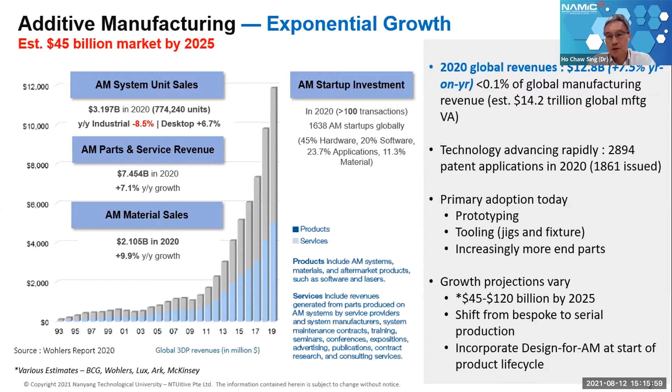One of the other points I wanted to talk about is that this technology, beyond materializing parts on demand to replace spare parts, the real value is in incorporating design from the start. You have to use the right design approach in order to design specifically for additive manufacturing, as opposed to design for traditional manufacturing. I'll give some examples in a short while.

And I mentioned earlier about new entrants - there are a lot of new companies coming into this space. Have you been following the news? ExOne, a binder jet metal machine maker in the US, was just recently acquired by Desktop Metal. Prior to that, there's been a number of SPAC mergers - special purpose acquisition vehicles created basically to direct-list companies. Desktop Metal went through that route. Velo3D, another 3D printer maker startup which supplies machines to SpaceX, Elon Musk's space company, has also been acquired through a SPAC merger.

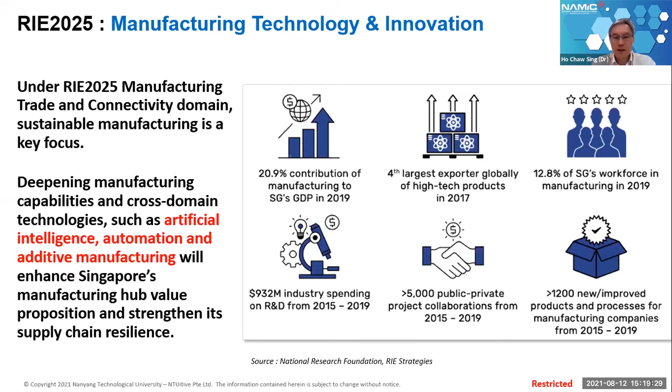The key drivers for using AM in any sector, and precision engineering covers a very traditional manufacturing space, creating products, components, systems, and even machines. Pretty much anything in the physical world is created using precision engineering technologies. We understand current players are very familiar with traditional methods, especially injection molding or some machining technologies. AM is a complementary technology.

If you're able to use and adopt this in a way that can support you either in speeding up your product development or help you create products which can enable more sustainable methods and minimize waste, this is one of the key things I would encourage the audience here to think about when you consider additive manufacturing - how we can use it for sustainable manufacturing.

Looking at all the reasons: you can accelerate the product life cycle, allow complex design. The economics of 3D printing or additive manufacturing favors high mix, low volume. If you're talking about huge volumes, this is not the right method to use. When talking about specialized molds that may improve productivity, where you can insert more complex conformal cooling channels, this is a classic example of where additive manufacturing can come in.

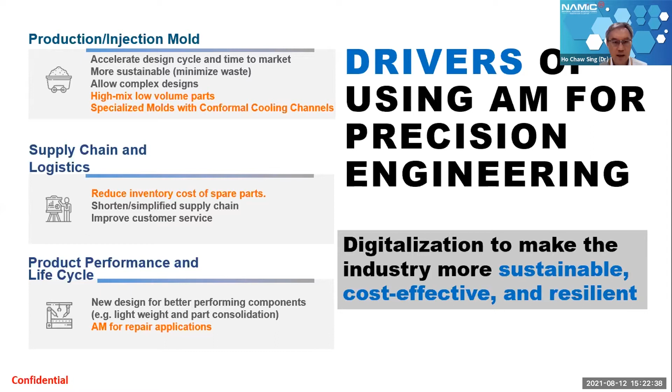Additive manufacturing was actually utilized in a lot of ways to support shortages we were seeing in the medical supply space - for example, nasopharyngeal swabs, which we undertook as an initiative together with Temasek and EDB. And of course, product life cycles and performance - if designed well, it can potentially help create better functional products with lightweighting, as well as be used for repair.

I'm not going to go through all this, but given the context that the PE sector plays such an integral role in almost every manufacturing sector in Singapore - healthcare, marine offshore, maritime, arguably transport, aerospace, and complex machinery, which happens to be one of our top performers based on the economic numbers we saw last year despite COVID.

This is something we believe will change the trajectory of competition, especially in the very cost-competitive environment we are in for the PE sector within the Southeast Asian market. We believe that by enabling additive manufacturing, a lot of traditional companies can add an additional element of design and potentially even move up the value chain to pivot to become OEMs.

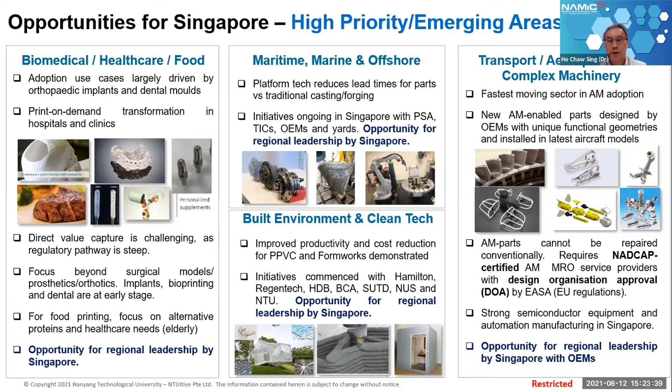These are some key examples of the actual situation for some sectors, just a few highlights. You can see what Sembcorp Marine has been doing. They worked with us in the last 5 years and are already trying to scale up their own in-house capability to provide AM solutions for servicing ship repair.

Ivaldi, ThyssenKrupp, and Wilhelmsen are all international companies, and they are in the process of starting a joint venture startup between ThyssenKrupp and Wilhelmsen to produce parts on demand for the maritime space. Even our Port Authority of Singapore has worked with us.

So we have created a platform technology that basically combines the cross-domain technologies I mentioned - AI, automation, and additive manufacturing - to produce twist lock pins. These pins are used in the ram spreaders which hoist containers at the ports, and they change out about 1,000 of them every year.

We're currently using this hybrid WAAM system to produce these parts on demand. The aerospace industry has been hugely affected in the last 1.5 years, but the good news is a lot of groundwork is being laid. ST Engineering Aerospace and even Additive Flight Solutions are currently AS9100 certified, which qualifies them to produce AM parts for the aerospace industry.

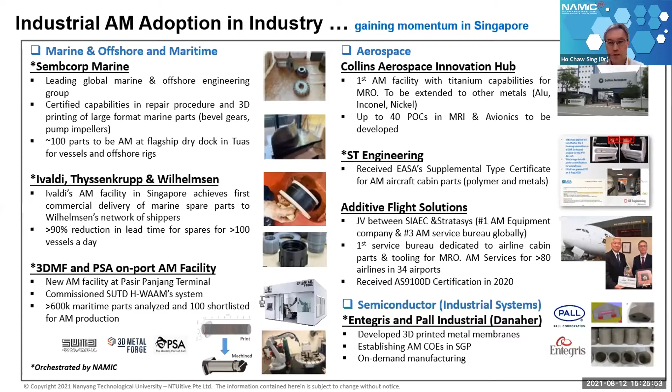All in all, there's a lot of growth and traction in the last 5 years in terms of building out the whole ecosystem, ranging from machine makers, powder suppliers, software distributors, and service bureaus dedicated to supporting manufacturing using 3D printing for the respective industries. There's also a lot of focus on research and development.

We are part of that ecosystem. Our differentiation is that we bridge between the public and private sectors in order to focus on what's workable for the industry. So if you have any ideas, please feel free to reach out to us.

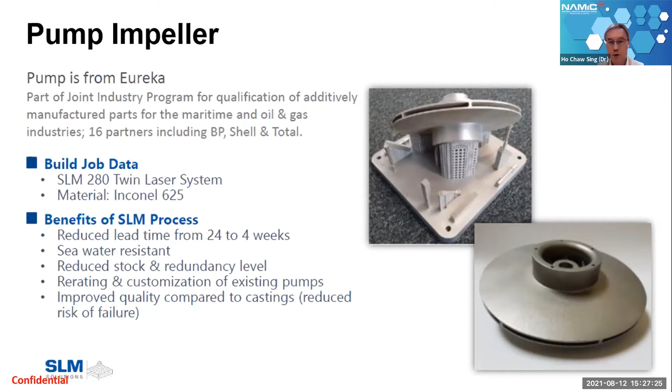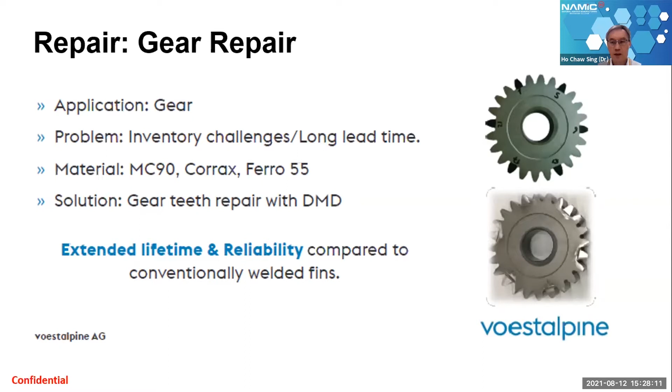Another example of AM is not just the build process, but it also helps with repair. This is an example from Voestalpine, which has a presence in Singapore. Traditionally a materials supplier, they have also established very good in-house capabilities using direct energy deposition techniques - essentially extruding powders and applying an energy source to melt it. You're able to do complex repairs, milling off the damaged portion of gears and putting new material on top, and the parts remain extremely reliable.

I mentioned earlier about the PSA example - here's a bit more elaboration. It was a multi-year project. We first had to establish the business case for developing a large format hybrid system, meaning it has both additive and subtractive capabilities. You can see the concept was using a robot arm, though you could arguably do this on a gantry if it makes sense.

We worked with 3D Metal Forge, a marine offshore 3D printing service provider, to commercialize the technology at PSA, who worked very closely with us on the process development. The picture is probably too small on screen, but we are now deploying 3D printed twist lock pins in PSA operations - they're actually running in field operations as we speak.

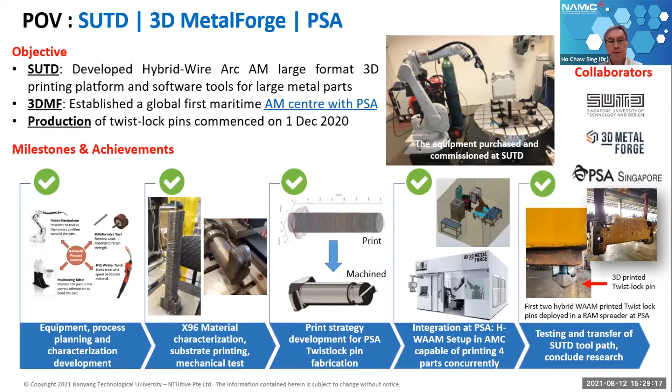Some other examples before I talk a little about our open grant call - covering the sustainable manufacturing portion. These are just some other examples to give you a sense that the limit is really what you can imagine doing with this technology.

So for a lot of the applications we're looking at, it's really about utilizing recycled materials. On the left side, we worked with this urban farm solution provider, Netatech, based in Lim Chu Kang. They used recycled pellets, and working with SUTD, we used this very large format polymer printer to produce these 3D printed floating farm modules. This is actually a very successful project showing how, with some imagination and design specific for this, it can be utilized for the urban agriculture sector.

On the right-hand side is another example. I want to highlight this company, MolyWorks. So we have plastics - this one is actually recycled metal. MolyWorks is a San Francisco-based startup. We brought them to Singapore back in 2019. They now have a presence here and are in the process of hiring people to set up Singapore operations. Essentially, their technology enables them to take recycled metals, scrap metal, into powder feedstock for additive manufacturing, and this has a huge impact on preserving our environment.

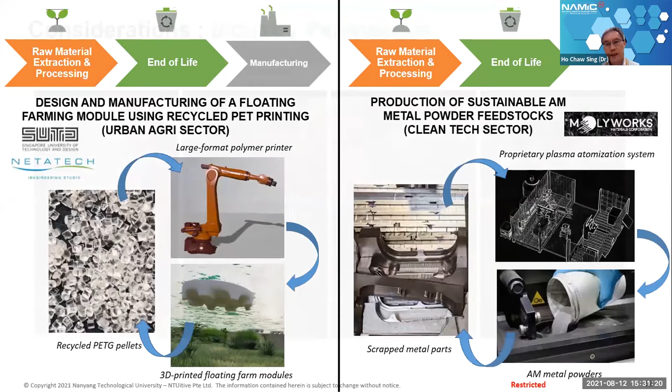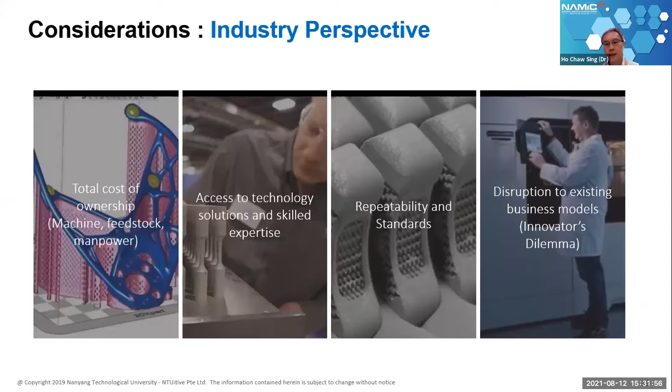Of course, at the end of the day, with all this promise, there are still challenges, and I don't want to go very deep into any of this. As the National Accelerator, we are constantly working with our trade association partners, such as SPETA and others, to address some of these issues. Every sector has very specific issues, and we want to work on some of these problems that companies like yourself are facing. So do come to us to discuss, even if you do not know how to get started.

One of the things we internalized as we were making plans last year during the RIE cycle was feedback from the industry about how do you actually even start - I want to apply 3D printing AM for my business, how do I even start? We internalized that a lot of companies don't even have an idea of the value chain of how the 3D printing process works. So this is what it is - just to give you a very bare bones thinking of how this whole AM journey can start for you.

The first process, in our view, is you need to first identify, if you're a manufacturer or an OEM, what kind of parts make sense and are suitable for 3D printing. Once you decide on that, you take the design and convert it to a format where you can apply simulations and potentially even redesign, to apply topology optimization - a process where you take away unnecessary materials where there's no load bearing - because this allows you to fulfill a lightweighting process. Less materials, lightweighting, and of course more environmentally friendly.

Once you've done that, you do the simulation functionally, to see if the part can perform as designed. Then the next question is, how much does it cost to produce this using 3D printing? This is the first step, and it's something we are planning - we have rolled out this program with Enterprise Singapore, and we will perform this work for free. We have 3 of our cluster entities, NUS, NTU, and SUTD, with this capability for part identification analysis.

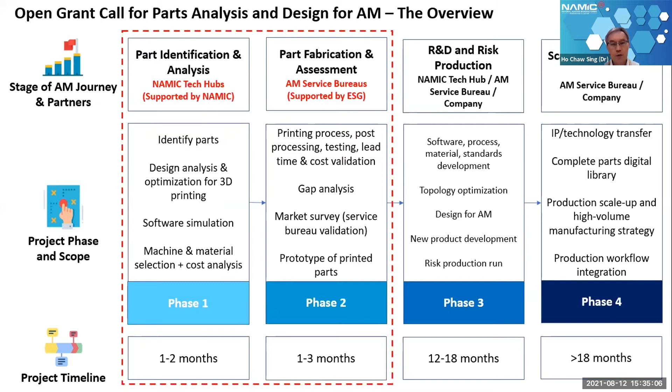There is a timeline to this, just to take note. We are currently in August 2021. All applications should come in by 30th June 2022. Because of the COVID situation, there's an enhanced support level of up to 80% applicable for any submissions from now to 31st March 2022. Each project cost will be capped at 40,000 per project. This is actually a lot of money - I would encourage you to utilize this opportunity. Again, if you don't have a clue how to get started, just contact us and we will discuss how to go about doing this. With that, I'll end my presentation and hand it back to Roy.

Thank you, Dr. Ho, for the sharing. Next, let's dive deeper into how you can streamline and optimize your metal additive workflow with Mr. Adrien, who is the Business Development Manager of Advanced Manufacturing at GF Machining Solutions. Adrien handles GF Advanced Manufacturing's portfolio, which includes innovative products such as laser texturing, laser micromachining, and additive manufacturing. His expertise in advanced manufacturing technologies enables him to offer end-to-end solutions to meet GF customers' challenges when it comes to industrializing innovative products and innovative ways to manufacture. All right, let's hear what Adrien has to share with us. Adrien?

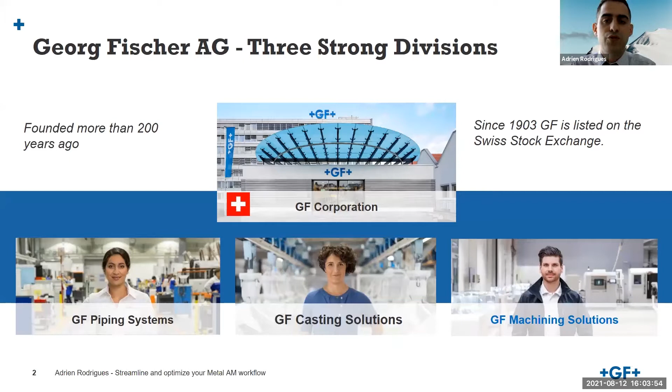The last division where the webinar will focus on, where we come from, is GF Machining Solutions, and we are a leading provider of machines, automation solutions and services to the tool and mold making industry, and also to manufacturers of precision components.

To talk about the products and technology in our portfolio, you can see that we have different high technology machines like EDM, for example die sinking machines or wire cutting machines. If you know some brands that we own, like Agie Charmilles, I think you will recognize them. We also have our milling technology, 3-axis, 5-axis, high-speed milling.

This is a former brand called Mikron, also from Switzerland. We also have spindles, like the brand Step-Tec. So we are providing very high-end spindles to other manufacturers as soon as they are talking about high efficiency, high performance spindles, they are using our spindle solutions.

You can also see that we are able to provide tooling and automation systems in order to automate the different technologies and really improve the flow of information between them. And last but not least, digital transformation. Everybody's talking about Industry 4.0. This is our new baby, and we are developing quite a lot of features about that.

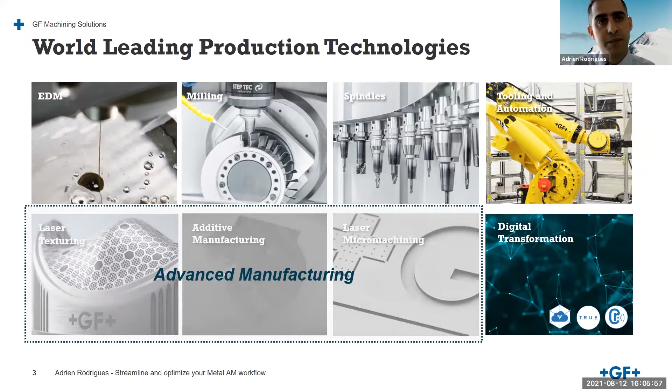In this webinar, I would like to show you how additive manufacturing could move from a technology of prototyping to a more integrated manufacturing process or technology. Today we'll talk about one example. It's not an example about mold and die, it's an example about the motorsport industry.

This is a turbocharger for motorsport, like for example you can talk about Formula 1. It's not exactly the real part, but it's a good example about how our integrated workflow can be applied to have good parts under tolerance without any deviation into the process.

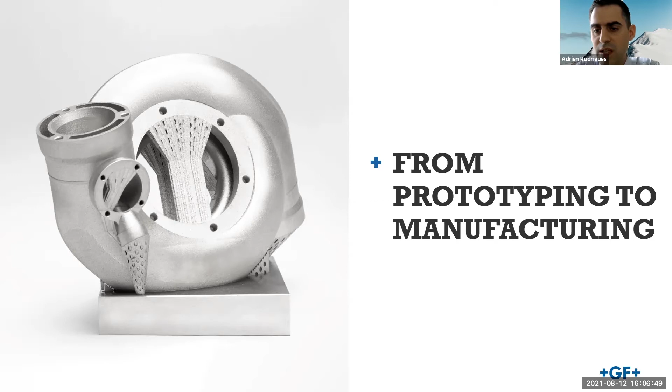The production of such an integrated manufacturing solution based on 3D printing technology requires a deep understanding of the upstream elements like the design, the preparation software, the printing technology, but also the material and parameter development, as well as the downstream elements, including post-processing like EDM, such as wire cutting or die sinking, also milling. And we can also think, if we go a little bit further, to add texturing technology onto the surface of the parts.

So we need to bring to the market a fully integrated workflow where customers can really master the entire process from the design up to the final parts. As a result, the capacity to offer such an end-to-end workflow is highly uncommon, so this is quite unique. And this is exactly what the strategic partnership between GF Machining Solutions and our partner 3D Systems is all about.

In an industry where all are learning and busy developing application capability, the power to offer an integrated metal additive workflow from a single provider, which is also an advanced additive user, is unique, and it can help shorten our customer's adoption curve.

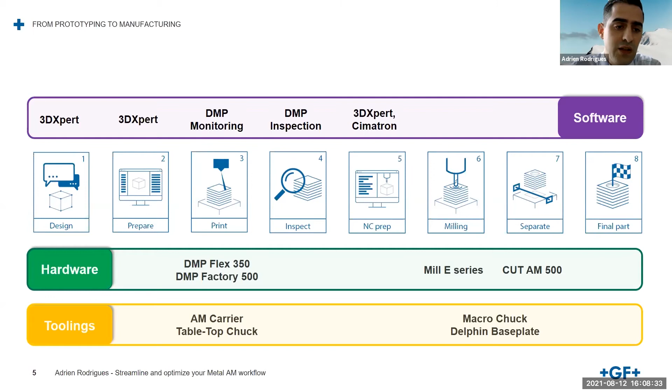If we take the view of the part that we saw just before, you can see the different steps that we did, like the design, the preparation thanks to our software 3DXpert, up to the building process, thanks to our additive machine, which is a DMP Flex 350. We also have the biggest machine on the market, the 500.

We are also able to inspect the good execution of the process in advance. We are able to simulate and generate the CNC program for any milling machine, not only our GF machines, but also other brands. And of course we are able to execute post-processing into a single solution provider.

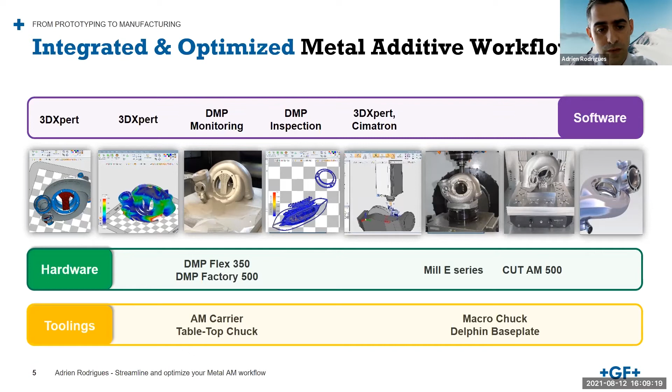If you look more into the detail about the different steps that we did for this part - and again, you can imagine the same process can be applied to a mold insert, there is no difference on that - with our software, you're able to design a part. So this is the part that I showed before.

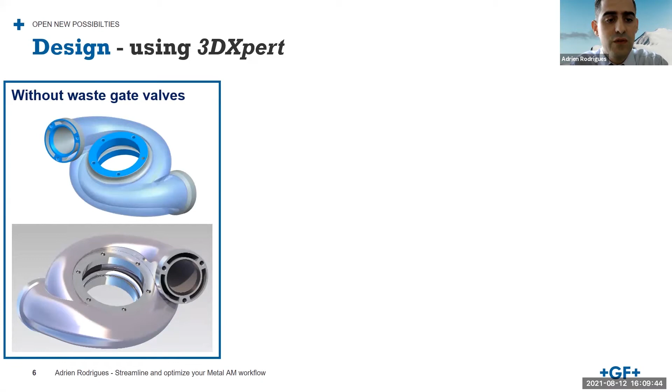This was the first design, where we also include an element into this design, which was a waste gate valve, just here. You can imagine how difficult it can be to cast in one piece this part, or also to weld these parts, because the thickness of the wall is very thin. We are talking about less than 2 millimeter wall here. So the complexity of such a design can be mastered with the AM technology.

At the end, the part that we'll talk about looks like that. So we have the valve, but also we integrate a double wall into the part in order to reduce the weight of these parts without any consequence into the performance and also into the manufacturing process. So this was the first step that we did with our 3DXpert.

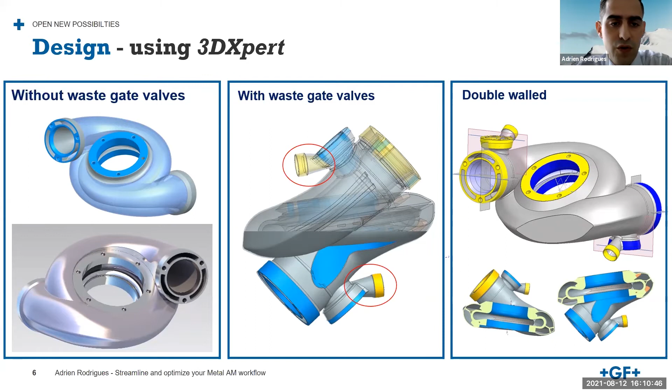And as we say, as soon as you prepare a design, you need to make sure that the execution will be well done. And thanks to our integrated workflow and also our 3DXpert before machining, we are able to prepare the program in order to make sure that the production will be done without any difficulty, both in printing, but also into the post-processing process.

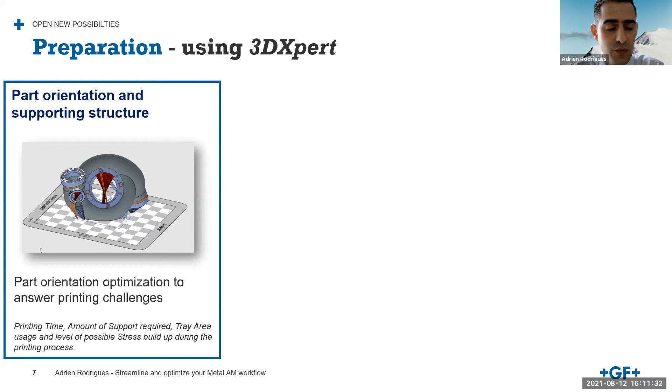So the software will advise us, here you can see in this picture, on the support generation needed for the building process, as well as the part orientation in order to optimize the building process or the building efficiency of your parts. Into 3DXpert, you are also able to simulate the process in order to make sure that there will be no deformation or stress into your parts. This is very important also into the printing process.

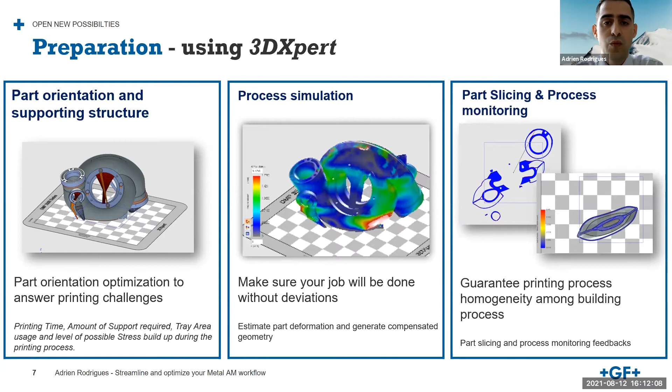And the last step that we are able to perform is to slice and to process, to monitor the full process in order to guarantee the well execution of the building process. The final goal is to make sure that your part will be printed properly. This is something that we always want to do at GF Machining Solutions.

We are always thinking at the customer side. We know quite well our customer environments. And as soon as you have one partner able really to guarantee the full workflow, even into this stage, this is what we call to be really customer centric. And this is what we are here about.

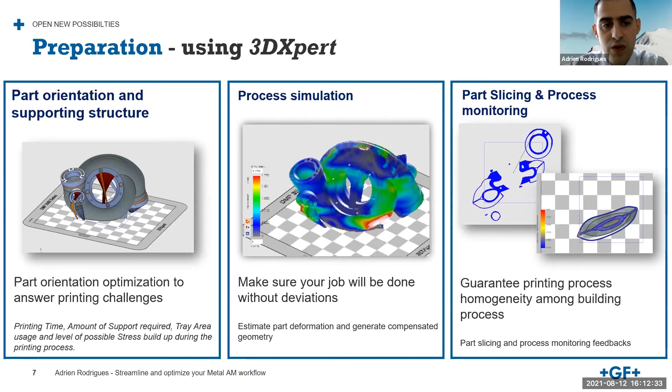But before building the part, we were talking about the preparation, the design preparation. Of course, we need also to prepare the machining. And we all know that after 3D printing, I would say 99% of the time, you will need a post-processing step.

And I would say the referencing of your parts is always a challenge for all our customers. As soon as you come from 3D printing up to the milling technology, you need to make sure that the position of your part is well done. And this is why into our AM machine, we include the very famous System 3R tooling.

I know in this webinar, most of you into the mold die industry know quite well the System 3R tooling. With that, we're able to make sure that the reference of your parts from the building process up to the separation process, up to the milling or to the separation, you will always have one reference. You don't need to do useless setup into the different steps of your process, which means you will optimize your process.

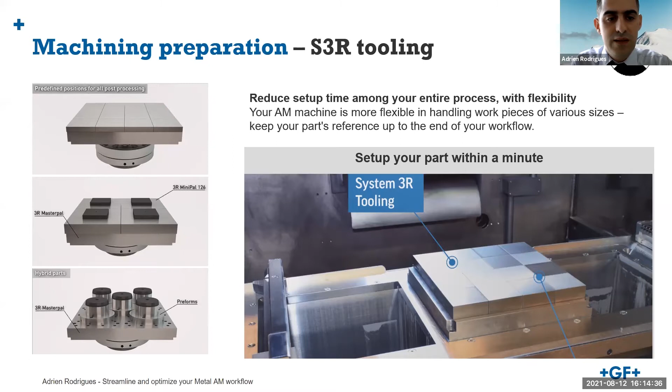So this is really, I would say, the key advantage of the System 3R tooling, which is already implemented into the building process with our DMP machine. So the DMP machine, the printing step has been done with our DMP Flex 350. And it really allows exactly what we mentioned before, to have a perfect printing process without any quality deviation.

This can be mastered thanks to our vacuum chamber. This is providing a consistent low oxygen environment up to 5 ppm during the process, resulting in minimum powder oxidation.

Minimum powder oxidation means higher quality of printing, especially for reactive materials such as titanium or aluminum, and the like. But also, if we talk about mold and die, we have powder similar to Stavax, which can also be applied.

The removable print module holds both fresh and used powder, as well as the printed parts, which can be pulled out of the printer and replaced with another RPM carrying the same or different powder, in order to minimize machine downtime. So here you have a machine ready for high production printing jobs in additive manufacturing.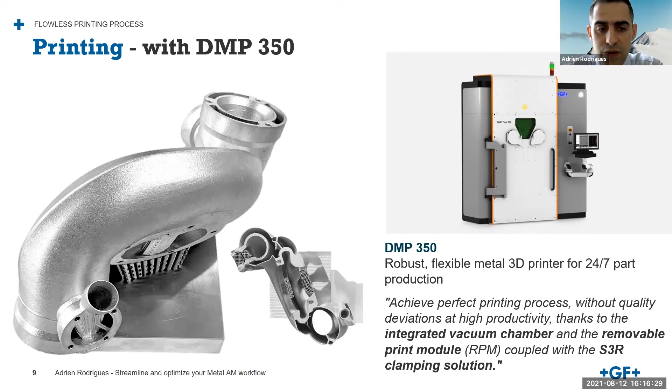As mentioned before, this machine is equipped with the System 3R clamping solution you've seen, which will be the key link to the next step of manufacturing these parts: the post-processing.

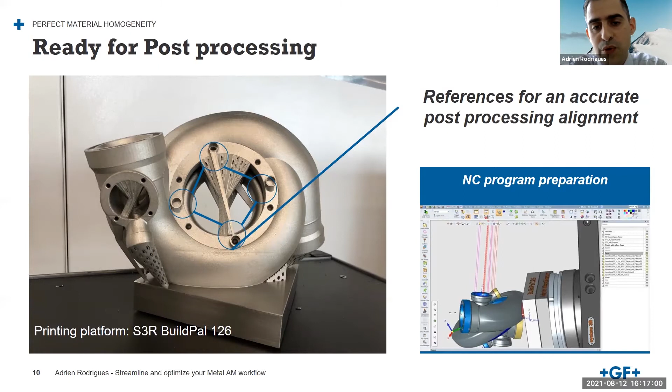This is a part right after printing, and to ensure the position accuracy of these 4 areas, the 4 holes you can see here, a milling process is needed. After printing, the part is mounted into the System 3R tooling right below, we prepare the NC program, and move to the milling process.

The milling process is done with a 5-axis milling machine. Here the goal is to machine these 3 areas, the 6 holes, to achieve the position accuracy that the motorsport industry requires, as well as the surface finish and concentricity of the holes. The bigger circles pose the same challenge as the last 2 small areas on the left-hand side.

This was done using our Mill E700U, which is a 5-axis machine, a high efficiency machine.

Why use 5-axis machines? This is the same advantage that applies to a mold insert. The goal is always to reduce the number of setups. Using a 5-axis milling machine, we're able to machine the different faces of the part in a single setup, which optimizes our customer's productivity, reduces setup time, and reduces the number of clampings or different setups needed on the parts. So that was the milling.

We also need to do the other side of the part, but I won't go through it since it's exactly the same process. After that, we need to separate the parts from the build plate, from the System 3R tooling.

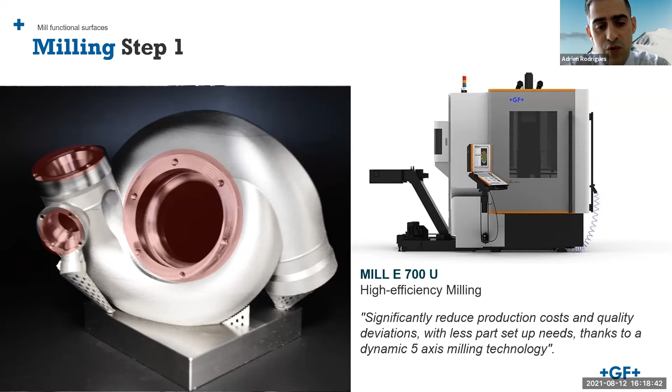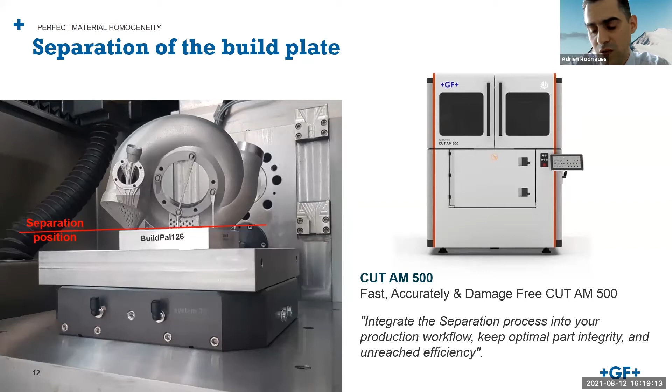For this we use a dedicated wire cut machine, a fast wire technology machine called the CutAM 500, which optimizes the separation process from the build plate. As I said, it's fast wire technology with a double spool, and it's also able to rotate the table to ensure your parts will not be damaged after separation.

Based on feedback from the field, since we already have quite a few machines out there, this technology ensures your part will always be separated without any damage. We experience no wire breakage during the process, even with remaining powder in your part or with very complex profiles. This is something the AM industry has been looking for for many years, and it's a solution GF brought to market two years ago.

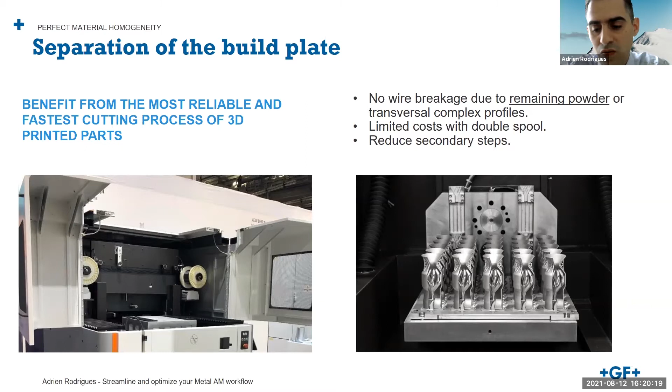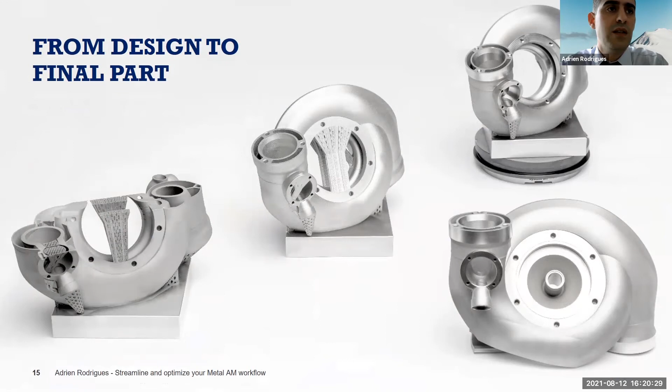So this was the story about these parts. On the left-hand side you can see the first printing process of the parts up through the milling process, and at the end, the finished part after printing, milling, and separation.

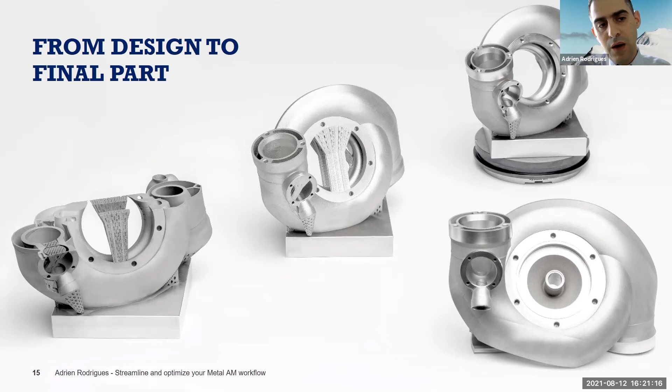This is a story we can apply to mold and die. I used this part because it's very challenging in terms of complexity, both for the milling technology and for separating the parts. For molding, this workflow concept can be applied as well, and this is what the manufacturing sector was looking for at GF, to move AM technology from prototyping to manufacturing. I'd like to show you one example of mold and die.

This is an example of a customer based in South China. This is a superstructure for fixing a smartwatch into its packaging.

This application is also a hybrid application. You can notice here on the right hand side where we print the part with our DMP machines, and on the left-hand side the conformal cooling channel that we add into the mold inserts in order to improve the injection cycle time of these parts.

You can see in the bottom left corner the different simulations in terms of cooling. With a traditional cooling system, the cooling is not very homogeneous. With the conformal cooling, we really optimize the conformity, I mean the homogeneity of the cooling of the plastic parts.

In this case, the customer enjoyed about 20% reduction of injection time, which was quite impressive for them. Obviously, when we are printing a mold insert, the benefit is really at the injection aspect, so 20% reduction in cycle time was really appreciated by the customer.

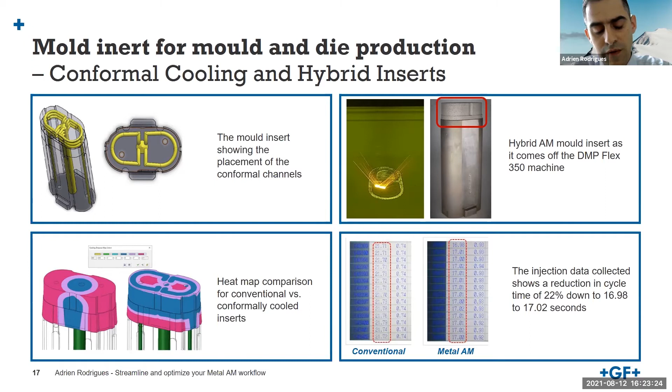So this was an application about mold and die, and we also receive requests about right after printing, right after separation, or after milling the shape or surface, or also the accuracy of our parts, bringing a touch of additional innovation through our very innovative technology, which is laser texturing.

With this technology, customers can also bring another aspect of innovation. As soon as you're improving your manufacturing process through additive manufacturing, if you go a step further with texturing, you can really improve either the aesthetical aspect of your parts through different grain, which is replacing chemical etching for example, or add a functional surface.

We are working with OEMs to develop functional surfaces. In this case, we can think about how to improve the demolding, or I would say reduce the sticking effects from the plastic into the insert of the mold.

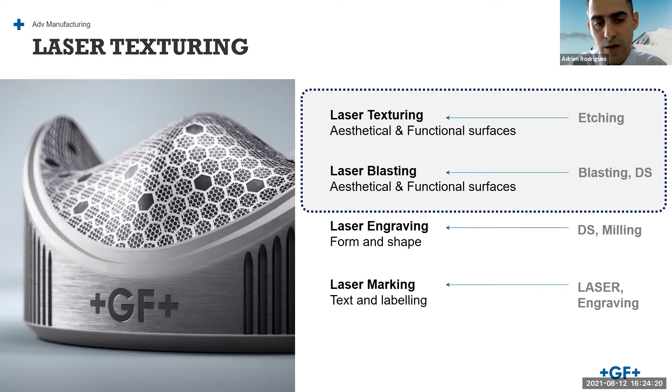So this was the story that I wanted to talk about. I would like to thank you again for your attention. You have my contact here.

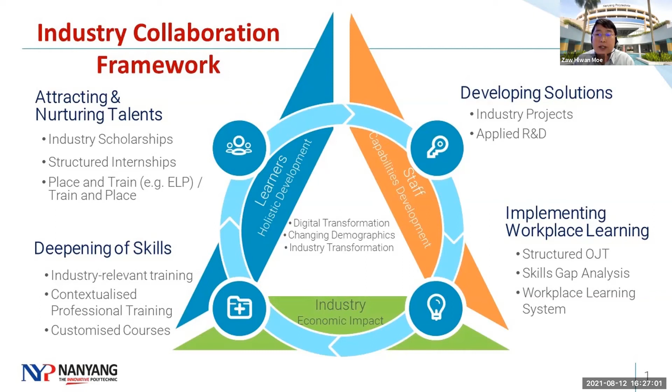Our partnership triangle includes learners, staff, and industry, where we have learner scholarships and also structured industry attachments to industries. We have staff development through our collaboration projects and also applied R&D. And for industry, we have been providing relevant trainings and customized courses, and also OJT at the industry place or at Nanyang Polytechnic, and throughout our workplace learning systems.

So how we partner is by stages, from various stages, from need analysis, customization of the training for specific industry needs, and also hands-on practical skills training, from basic, intermediate to advanced, including future-ready on-job trainings, and also providing solutions, co-creating together for new breakthroughs with our NYP's innovation centers via companies and collaboration projects.

Our Center of Digital and Precision Engineering has been established earlier, and it has a wide range of precision engineering setups and groups, including additive manufacturing.

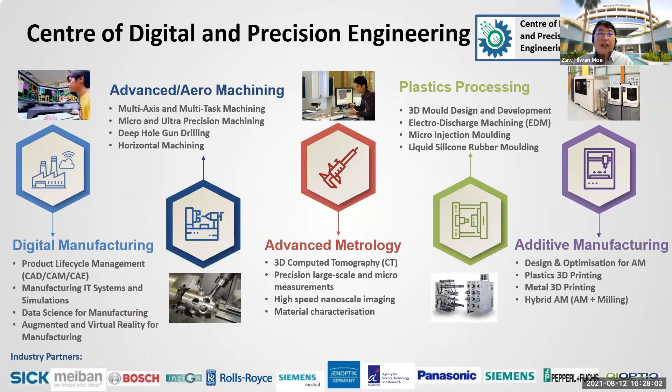Then later on, around 2014, with the support of EDB, we established Nanyang Poly's Additive Manufacturing Innovation Center, and we have been providing AM solutions and also providing manpower training with short courses, work skill programs, and also a specialist diploma in precision engineering on additive manufacturing and SkillFuture series programs.

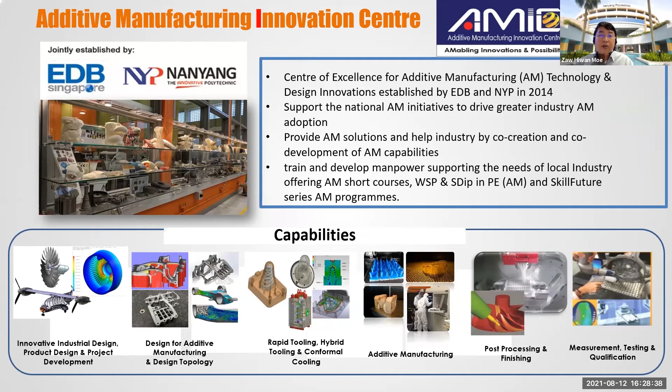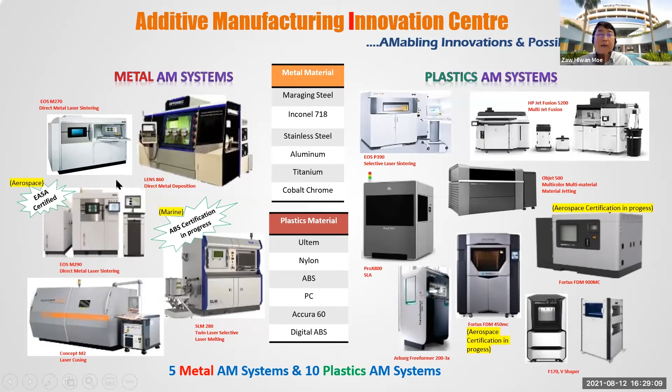So we have been using our training facilities on both metal AM systems and plastic AM systems with a wide range of materials industrially applicable to precision engineering and also other sectors. These are more popular or widely used industrialized systems that can be directly applied to the needs of our local industry.

Our industry verticals include PE as well as aerospace, marine, offshore, and medical healthcare. So we have a wide range of applications and also a lot of projects over the years, together as a testbed for industry, providing solutions or joint collaborations.

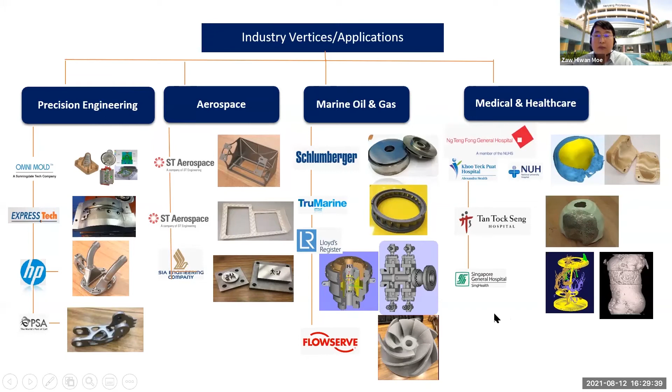As an example, we have a collaboration with Sunningdale Tech and also a NAMIC grant project, thanks to Sunningdale, Simon, and also NAMIC. So we have generated software for quick simulation and also automatic generation of cooling channels. That is developed and already deployed.

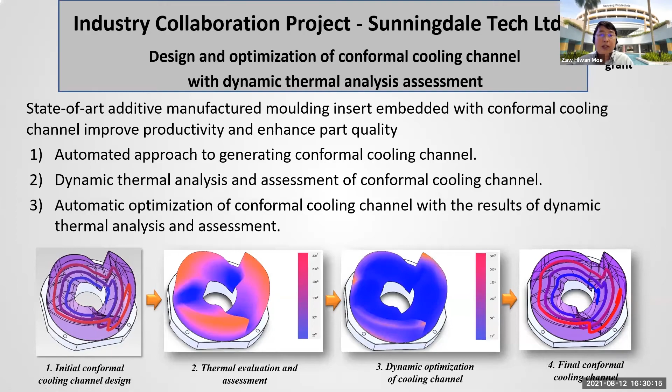The next project is also the tooling, for example conformal cooling for the light guide of a side mirror of a car. With this project, we managed to maintain the geometry and accuracy of the injection molded part, which is very thin and also transparent. We have provided specialized cooling via simulations and optimization of parameters. We developed this together with Express Tech, so they managed to secure the job order from the main con or OEMs for this tooling project.

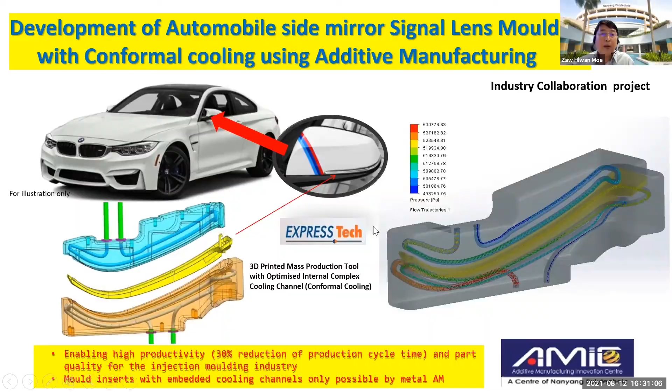The next one is also a NAMIC grant, recently completed, a breakthrough to obtain EASA supplemental type certification together with ST Engineering Aerospace. We jointly developed a solution to go through the certification, AM qualification, and certification processes, and came up with the optimization for this type of cabin component for aircraft use. It was lightweighted and topology optimized, and certified for use in the aircraft.

Then our process of direct metal laser sintering EOS 290 was certified or qualified for printing aerospace parts. We further developed, together with ST Engineering Aerospace, some of the aerospace components as well.

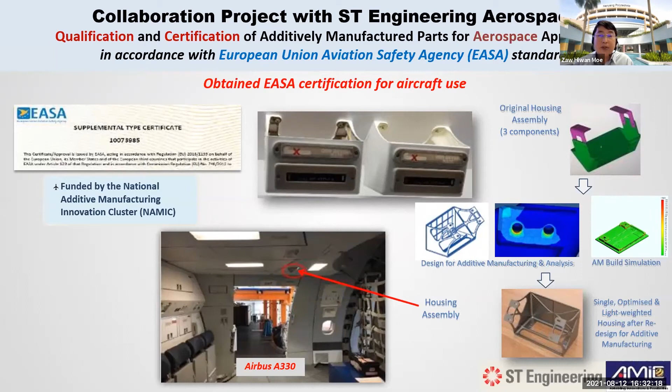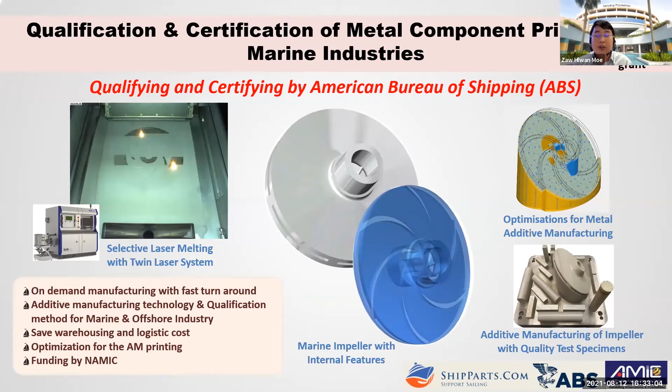In addition, we also demonstrated marine qualification and certification of 3D printed or additive manufactured parts, for quality control and quality processes, from quality records to process control for marine applications. This was from the certifying body, American Bureau of Shipping, and with the partner shipparts.com, who is a distributor for various marine components. This is also a NAMIC grant as well.

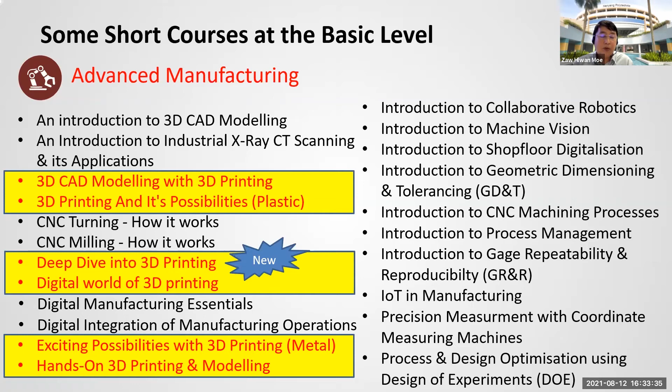So in terms of the trainings, we have various areas of industry trainings, from basic, intermediate to advanced level, and a lot of short courses and a suite of 3D printing or additive manufacturing short courses, from 1 day to 2 to 5 days.

And if there are deeper skill and training needs, we also provide specialist diplomas and different programs, WSQ, SGUS, and also work-study programs, WSPs, with different qualifications and different durations.

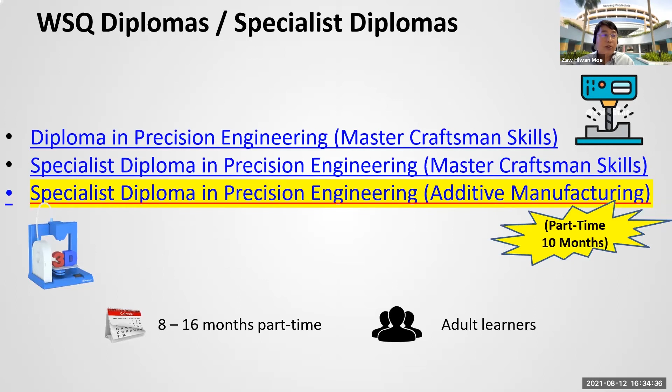For example, we have specialist diploma and WSQ with SSG grants for precision engineering diploma, master craftsman skills, and also specialist diploma in precision engineering, master craftsman, as well as specialist diploma for additive manufacturing part-time courses. We have been running 2 intakes per year due to high demand since 2015, so it's already more than 11 intakes conducted.

For daytime, we have different programs for SGUS. For unemployed Singaporeans, we have government support of 1,200 per month for the participants. These SGUS programs include additive manufacturing, with 2 days per week for 10 months.

Then for work-study programs called WSP, earlier called the earn and learn program, for jointly training industry employees with Nanyang Poly and also with the company, with on-job training at the company. We also have different areas of specialist diplomas, including additive manufacturing.

For this work-study program, we are targeting fresh poly or ITE graduates, graduated less than 3 years, employed by the company and put on the on-job training for these programs. The incentives can be up to 15,000 for the company, and for participants up to 5,000, under these programs.

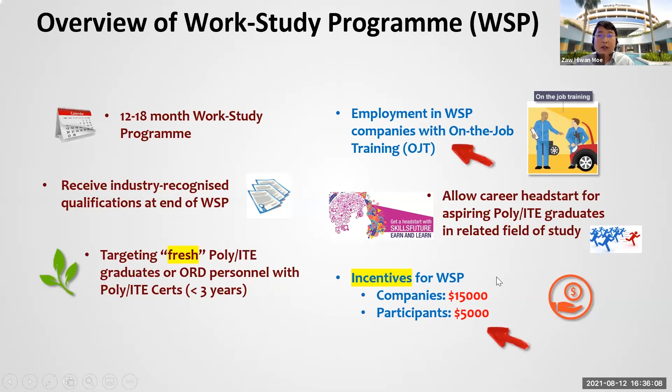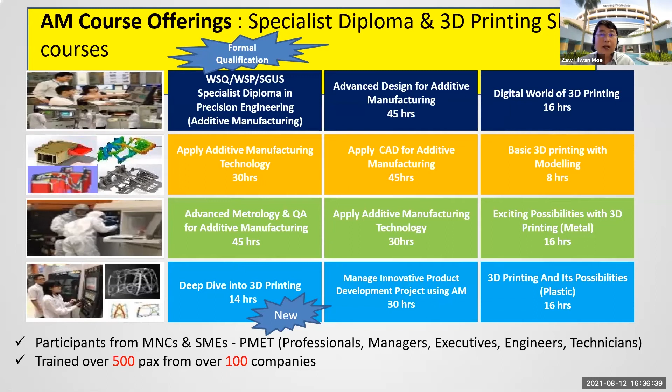So our AM offerings, additive manufacturing trainings, we have various formal courses to short courses for different levels and different types of knowledge and skills. Over the years, we have trained more than 100 companies, over 500 participants, mostly PMETs from precision engineering sectors.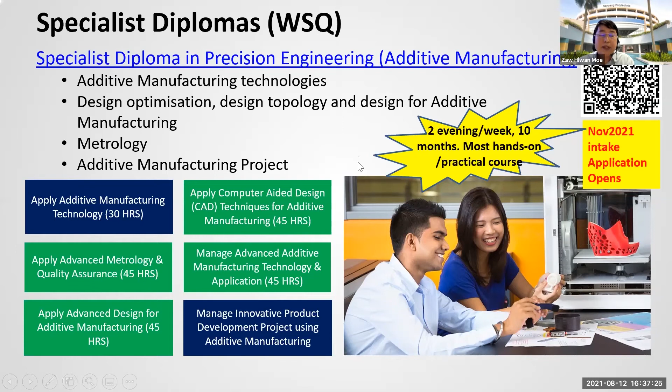For specialist diploma, it is a part-time WSQ with structure from basic, intermediate, advanced to specialist level, with pairs of modules from basic design and process, advanced design and process, and also specialized projects. The structure is 2 evenings per week for 10 months, and most of the modules, more than 70 to 80%, are hands-on lab-based modules.

Participants need to come to our labs and do their studies and practicals. Industries from various sectors have been taken up, and we have batches of completions under these programs.

For short courses, we have a new short course coming up, a collaboration with Materialise Belgium. We have a 2-day short course in September, where we have an overseas trainer from Materialise conducting online training, and also 1 day onsite in NYP for demonstrations and industry project explorations. This is under the SkillsFuture grant as well, for various options for citizens and for companies.

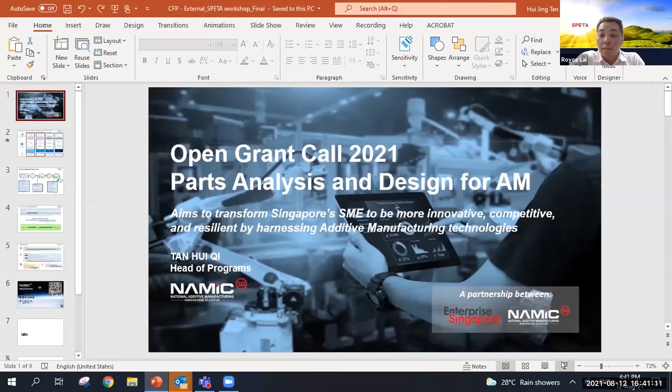Thanks, Royce. Good afternoon, everyone. In view of the tight timing, I will quickly share about the grant call application process that we have launched with Enterprise Singapore recently. I will skip this slide where earlier Zaw has already shared about the details of the grant call, which consists of phase 1, the part identification analysis with the NAMIC tech hubs, the 3 universities, and phase 2, part fabrication and assessment with the AM Service Bureau.

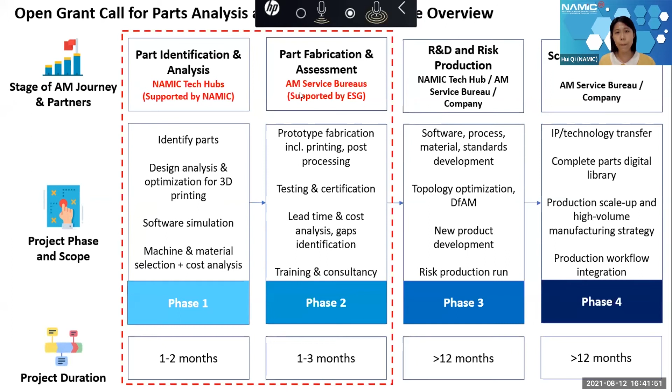So I will jump straight to the application process. This is the application process flow that all companies interested to apply should take note of. In this grant call, as it is separated into 2 phases, the proposal that we receive will also need to cover the scope that the company would like to do in both phases. The company only needs to submit a one-time proposal, which consists of the list of parts that they have identified and would like to study and print in this entire program.

The proposal should be crafted together with the AM service provider at the beginning, and should include the problem statement and part details, and also the clear deliverables and timeline for the 2 phases. The Service Bureau should also provide the indicative project cost to the company, which includes fabrication, testing, training, and consultancy cost items. This proposal will be sent for review by our panels, and once approved, we will issue the letter of award to the company, and there will also be an agreement between the university and the company. Then we can start the phase 1 part feasibility assessment process.

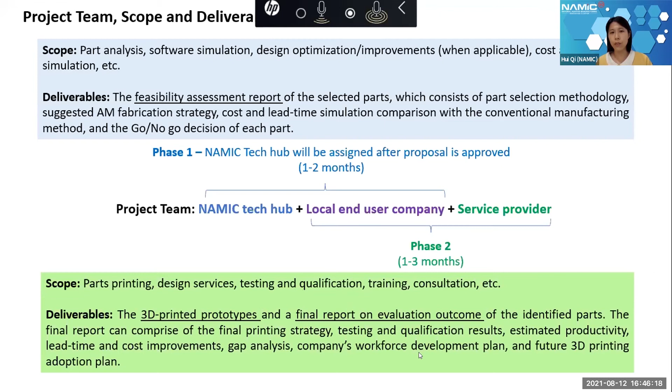There will be a gap analysis discussion together with the service bureau. And if the company decides to proceed, we will also get the company to share their workforce development plan and their future 3D printing adoption plan.

The next thing I would like to share is the application details. For eligibility, the company applying for this grant should be a local company that falls under the EDG criteria. They have to have legal entity and presence in Singapore with more than 30% local shareholding, and all work should be conducted in Singapore.

In terms of funding support, phase 1 will be free of charge. The company only needs to provide matching in-kind co-funding, for example manpower. In phase 2, it's supported by the EDG scheme through ESG.

The company can put up a project with maximum 40K project cost, and EDG will defray up to 80% of this project cost. Which means if you're putting in a project that costs 40K, the maximum support you can get is about 32K.

So this is a highly incentivized project, which we really encourage local companies to leverage on. This 80% support level will last until 31st March next year. After that, it will fall back to the typical 70% level support by the EDG grant.

The application timeline-wise is already open now. It will close on 30th June next year. So we encourage companies to submit as soon as possible, especially before 31st March, to be qualified for the 80% incentive. The proposal template will be available on the NAMIC website.